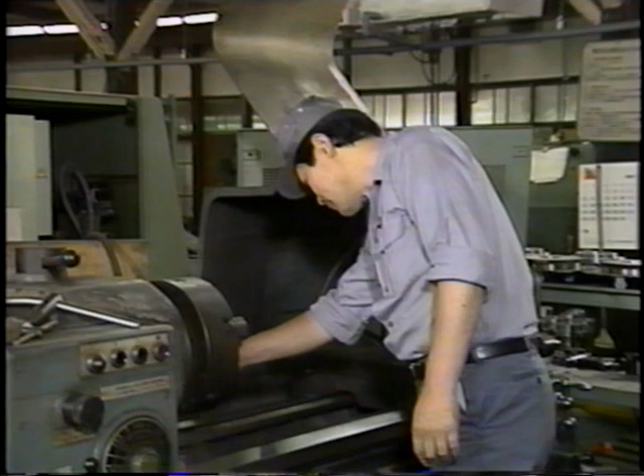But what does this have to do with work in the factory, you may well ask? Well, setup operations can be puzzling, and they're all to do with putting things in order, too. The only difference is that this is only a game, and my time is not money. But if this was a setup operation in the factory, what would happen then?

There's a real problem if you don't know when you're going to be able to start the next production operation because you have to wait for setup. Right? So, what we all want is zero setup losses, no waste of time, no waste of effort, no endless repetition, and that kind of thing. And that's what this video is zeroing in on.

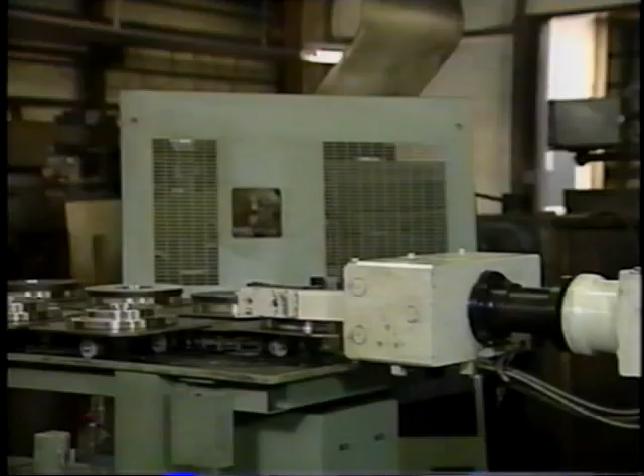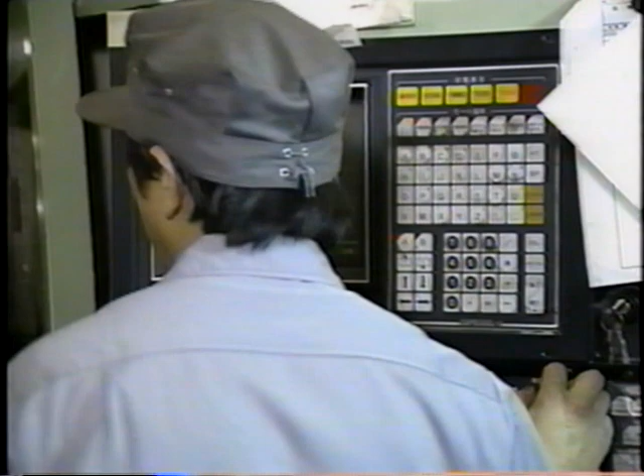The vital work of operators is to produce fine quality products through efficient use of equipment. But if the work process is constantly delayed as a result of setup operations, the production volume goes down and the cost per product goes up.

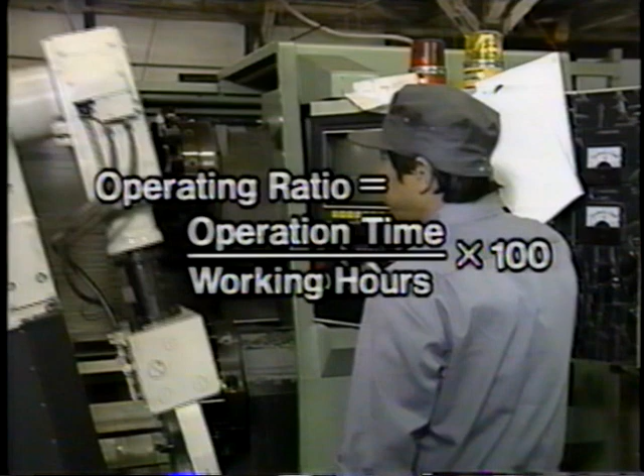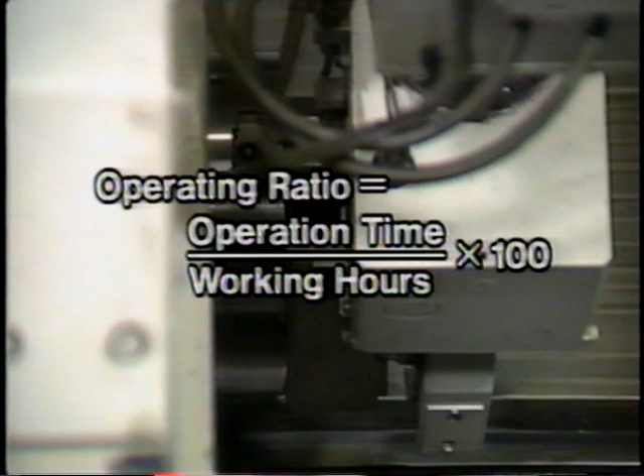The operating ratio of equipment equals operation time divided by total working hours multiplied by 100. The result clearly shows what percentage of our working life is spent productively and how much is basically unproductive. Reduced stoppages leads to longer actual production time and a far better operating ratio.

For example, with equipment that is capable of producing 100 items per hour, if 1 hour is lost for setup operations and these have to be done twice during one 8-hour shift, then the total operating time will only be 6 hours and the number of items produced will be 600. The operating ratio is only 75%.

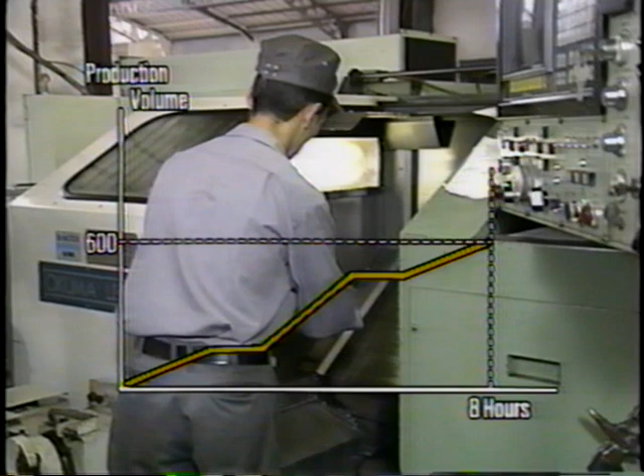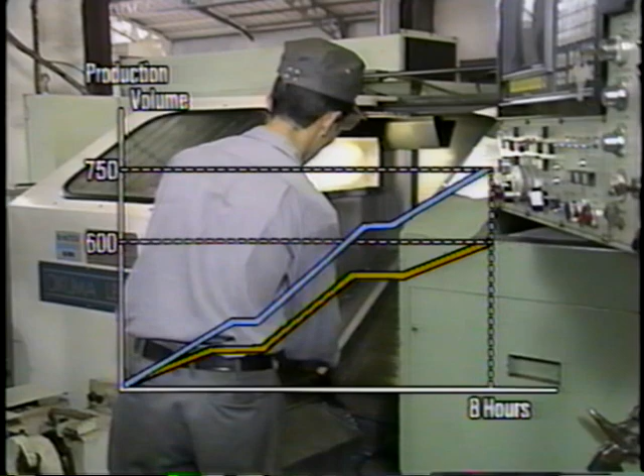By cutting the setup operation time to just 15 minutes each time, we can increase total operating time to 7.5 hours, and 750 items will be produced, giving us an operating ratio of 93.75%. In other words, there will be a 25% increase in productivity.

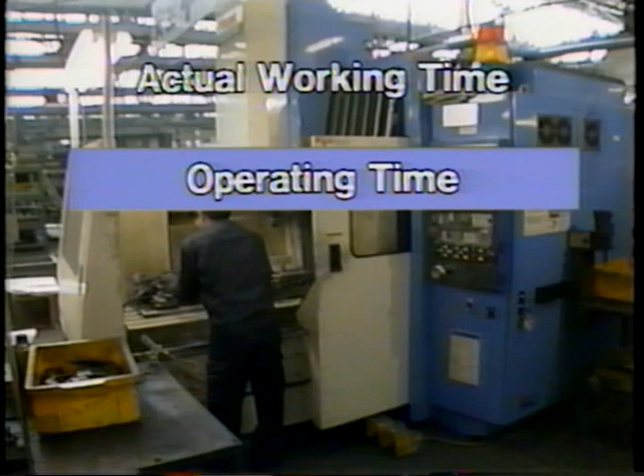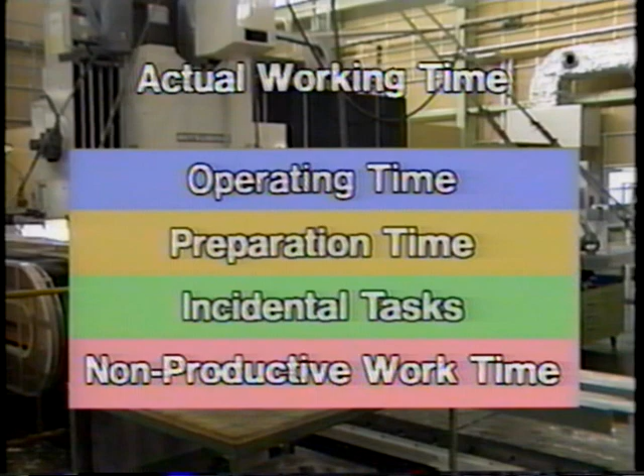Let's see how this works in practice from an operator's point of view. Our actual working time is divided into operating time, preparation time, incidental tasks, and non-productive work time. Preparation time includes necessary preparations both before and after the production process. Incidental tasks includes measurements, checking with manuals and plans, and so on.

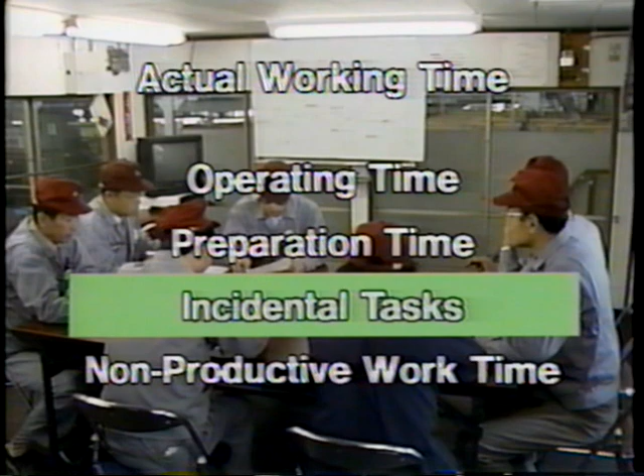Non-productive work time includes any activities outside actual production activities, such as meetings and clerical matters. If the non-productive time spent each day is more or less fixed, then simply by reducing the time for incidental tasks and preparation time, operators can increase their operating time, in effect lowering the cost per item. Get the idea? Losses in setup operations are naturally a problem for the operators.

What I think we should do next is take a look at what we mean by setup losses from 4 different viewpoints. 1. Work procedures. 2. Organization of setup operations. 3. Accuracy of equipment, jigs and tools. And 4. The work environment.

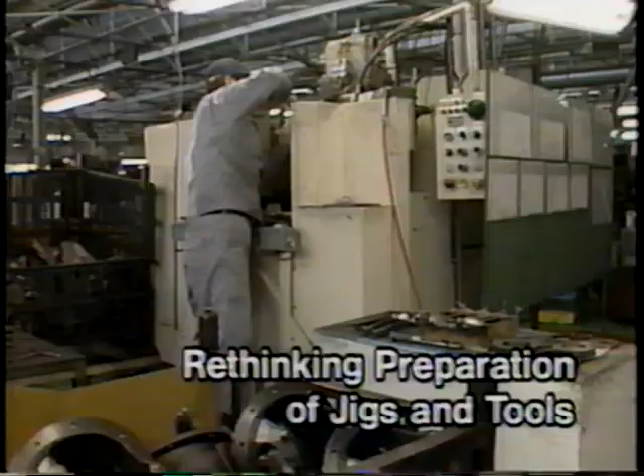Most factories use a variety of jigs and tools during setup operations. Although according to the basic rules of 5S, these should all be kept in a centralized position, three things often occur. Items are not in the right place. It's not clear who is using them. And some items are damaged or broken.

If you have any of these problems, then time is wasted looking for the necessary items and you may not be able to use them when you do find them. The point is that jigs and tools needed for setup operations should always be kept and used in such a way that the operator who needs them never has to move around searching for them. In other words, no moving and no searching.

To ensure this, there are three important questions you can ask yourself. Are your jigs and tools suitable for the job, and is there a sufficient quantity of them? Are they stored in an accessible place and clearly marked? And are they available for immediate use?

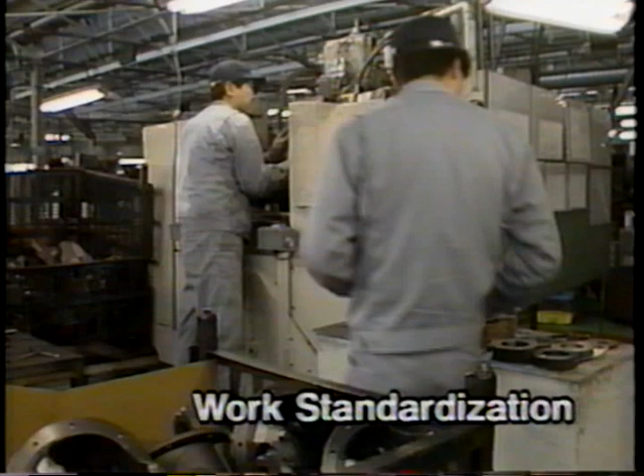On the other hand, even if all the preparation is done well, unless the work procedure for setup operations is correct, there will be little improvement in efficiency. Product quality and production time will vary if each operator sticks to different work procedures.

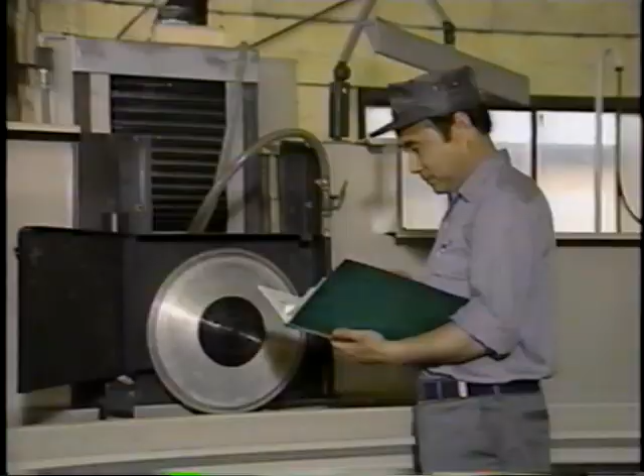Each piece of equipment basically has its own work procedure. It is very useful to draw up a standardization checklist that everyone can understand easily. It should be readily accessible and everyone should be trained to stick to the right operation method rather than use their own individual way.

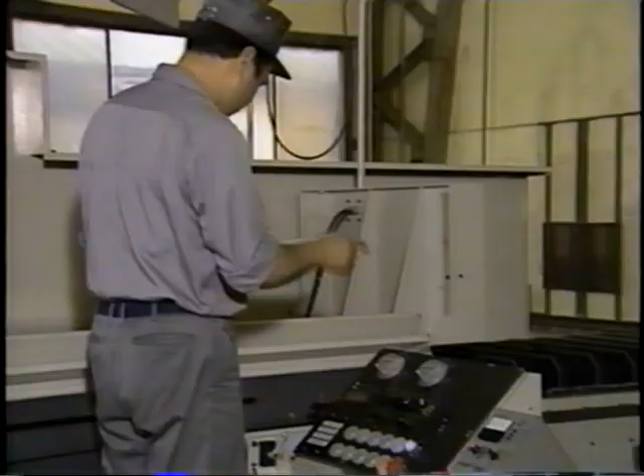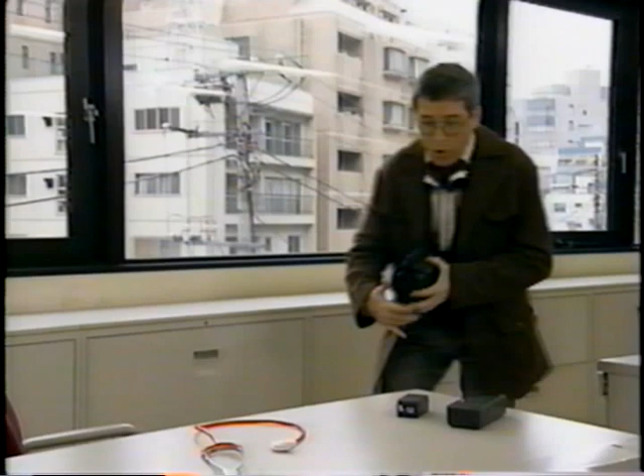5, 4, 3, 2, 1, action! Oh, good, good. Hold it right there. Don't move. Good. Oh. Battery low. Is your battery okay? Did I charge up that other battery? Oh no! Dead! Failed in my setup again. It's reviving!

Which reminds me of what I want to say next. There are two stages of setup. External setup, and you guessed it, internal setup. Internal setup means setup operations which can only be done by stopping the equipment, like stopping to change the battery. And in the factory, that means breaks in production, and that causes losses.

On the other hand, external setup can be done while the equipment is still working. For example, getting the battery charged in advance. In the factory, production can continue while this is going on, and the result? 0 losses for that phase of the setup. But not everything we treat as internal setup necessarily has to be internal. We should have a little think about whether some internal setup operations could in fact be converted into external setup operations.

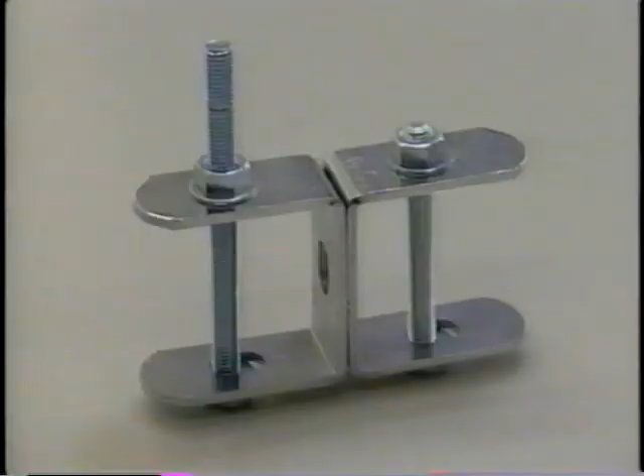You can either save or waste time with setup operations. For example, look at the size of this bolt. Enormous. Take me a long time to get the nut off. Who designed this? A time waster, no doubt. This is only one. Just think if you had 4. But we're always coming across this type of thing in the factory. At last. But this, on the other hand, the right size. No waste of time, no waste of energy.

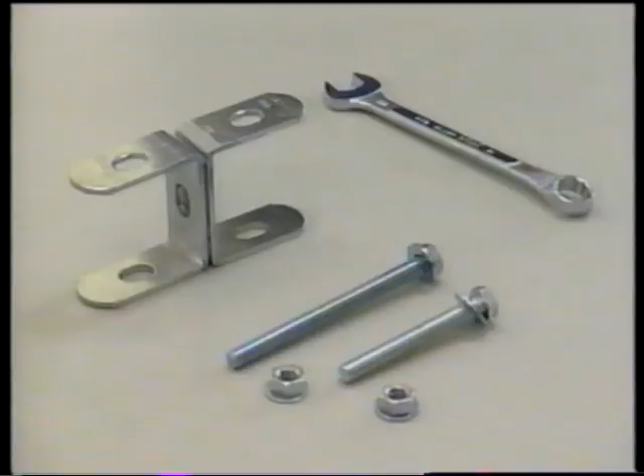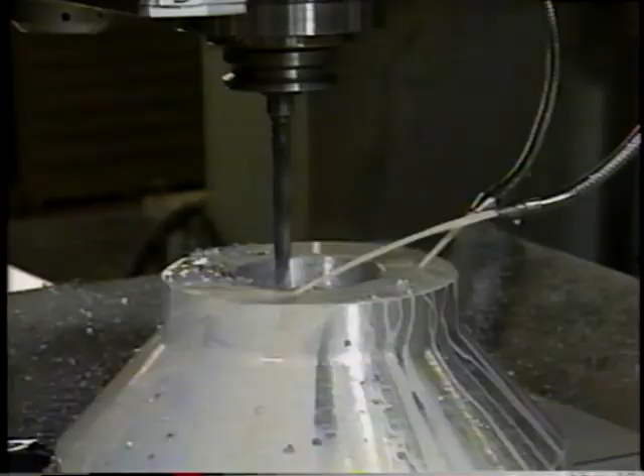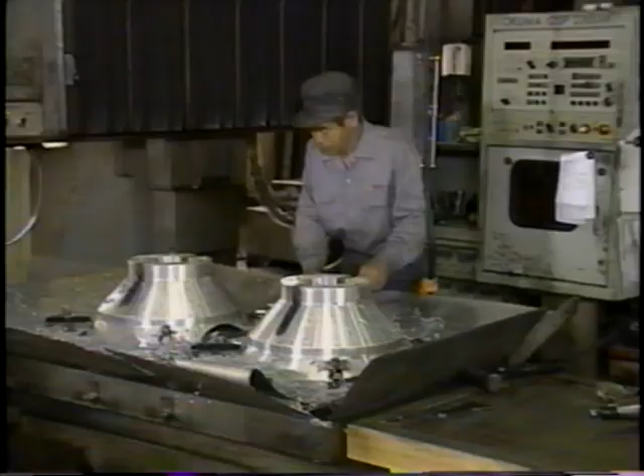Here's an example of improvement of setup operations. In this factory, workpieces used to be fixed on a pallet one at a time for drilling and processing. A lot of time was wasted during workpiece exchange. The improvement implemented here was to fix two workpieces on the pallet at the same time and control processing with numerical control. The time spent removing and replacing pallets was greatly reduced through careful thinking and the use of automated equipment.

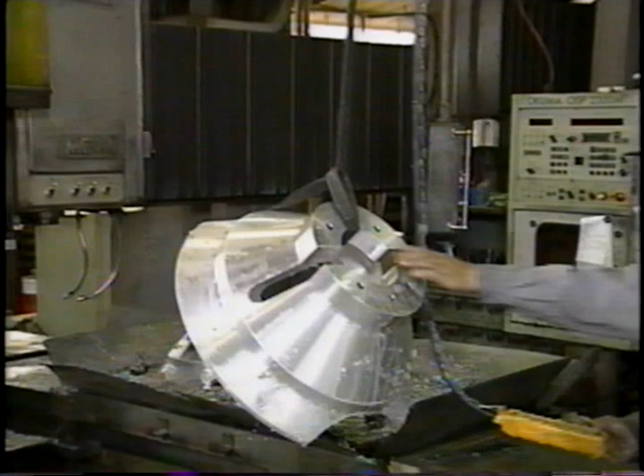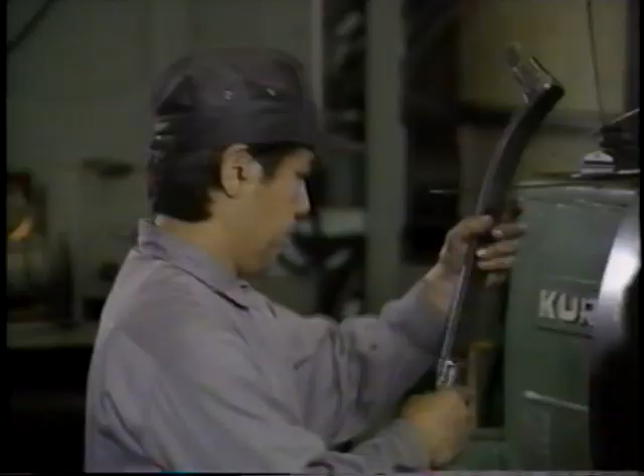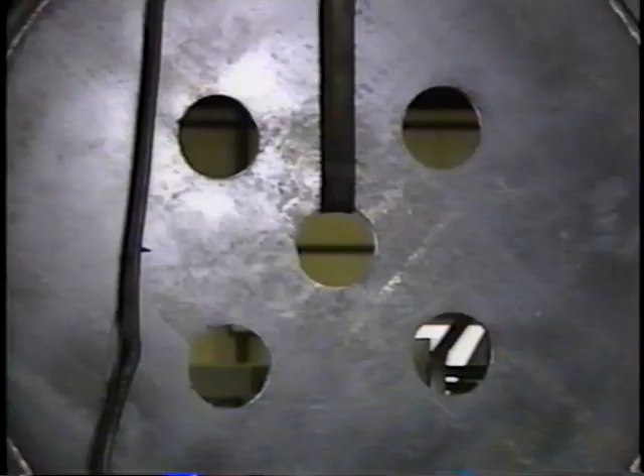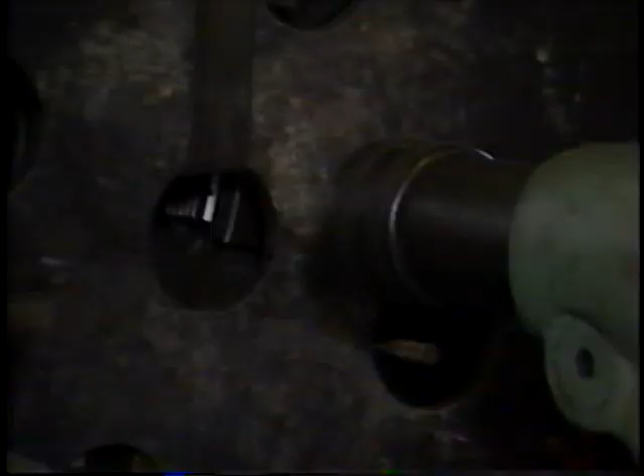You can also reduce setup time by giving careful thought to the shape and condition of the workpieces. This lathe processes the front face and edge of flywheels. Before improvement, a chuck was used like this, so it was impossible to process the front face and the edge simultaneously. The solution was to add holes to the wheels so that chucks could be fixed from the front. Now both the setup operation time and the processing time have been significantly reduced. This rethinking of shape and condition of workpieces can be applied widely to reduce the number of setup operations and the number of procedures involved.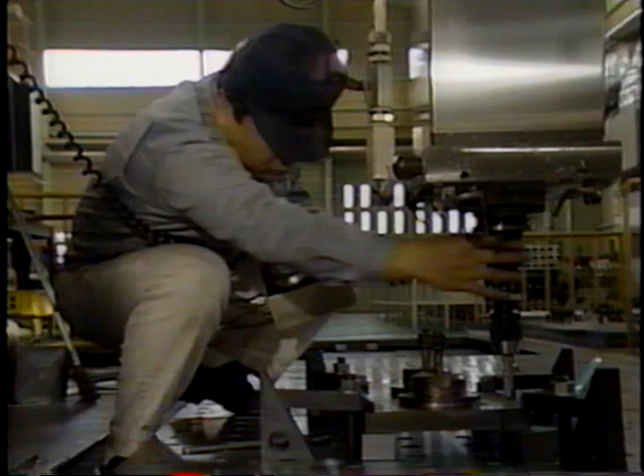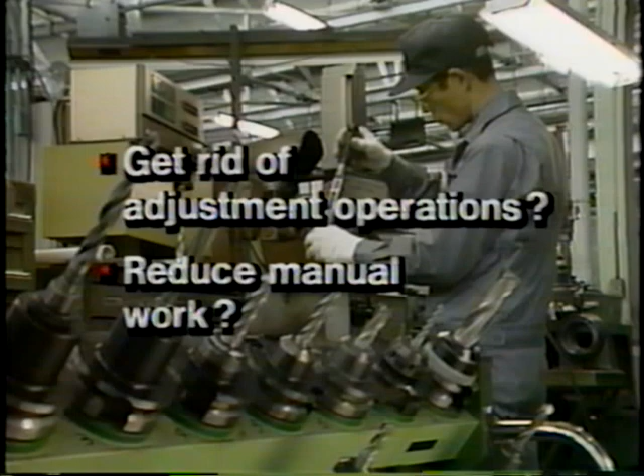It's true to say that a large part of setup operation time consists of adjustment operations. Adjustment involves a repetition of corrections until you can find the optimum and stable conditions for production. This requires trial processing and checking. So it's not just a matter of time. It also depends a great deal on the technical skill of the operator. Any mistakes, and you may have to repeat the process. What we have to ask is whether it's possible to get rid of the adjustment operations and get machines to do the work for us. In other words, convert manual tasks into automated tasks.

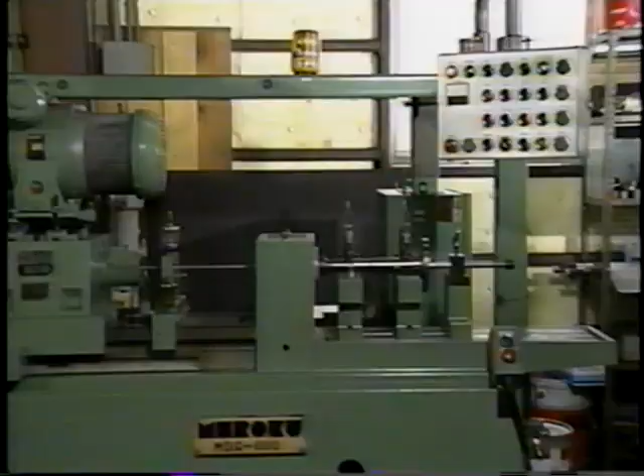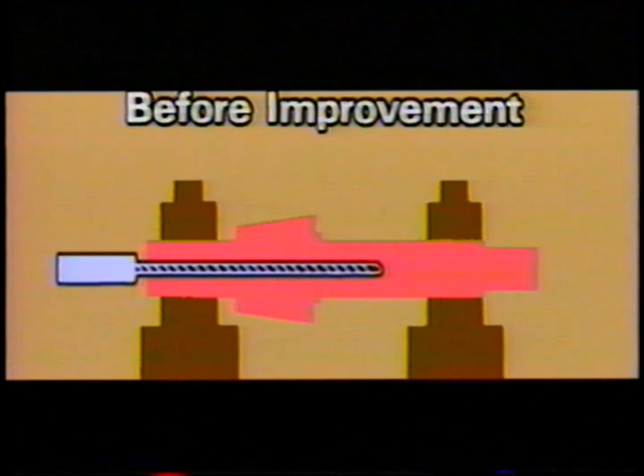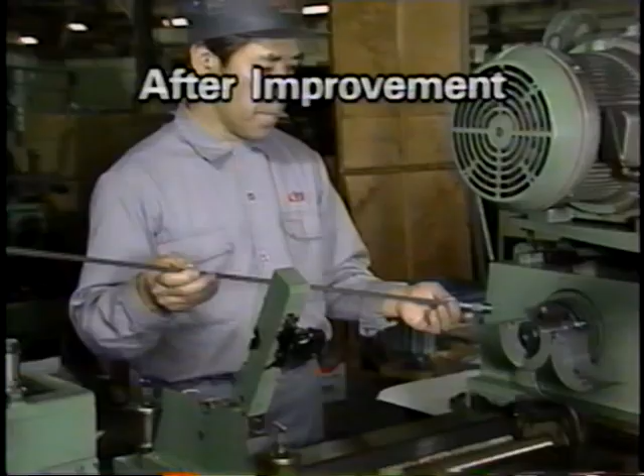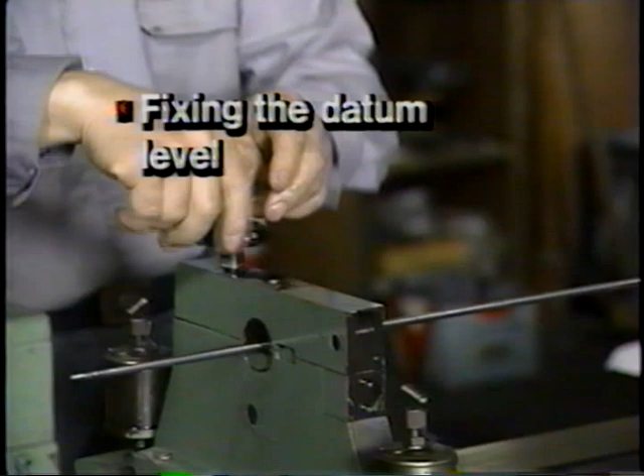Here's an example. This equipment is used to drill holes in spindles. It used to be necessary to drill from both ends to complete the hole, involving adjustment time between the two drilling operations. After some thought, a way was found to drill the hole in one operation using a gun drill. You can also reduce adjustment time by improving these 3 points: fixing the datum level, measurement methods, and accuracy of equipment, jigs and tools.

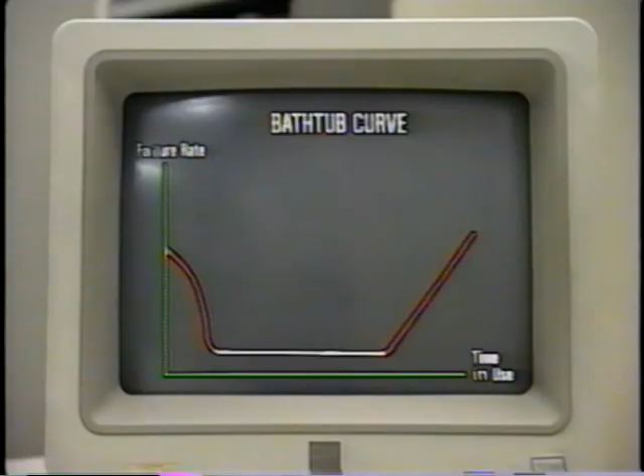I've got a great graph here to show you. It looks just like my bathtub, and in fact, that's what it's called, a bathtub curve. It shows the length of time equipment has been used and the rate of breakdowns. When equipment is first used, problems often occur, but these are usually dealt with by the manufacturer.

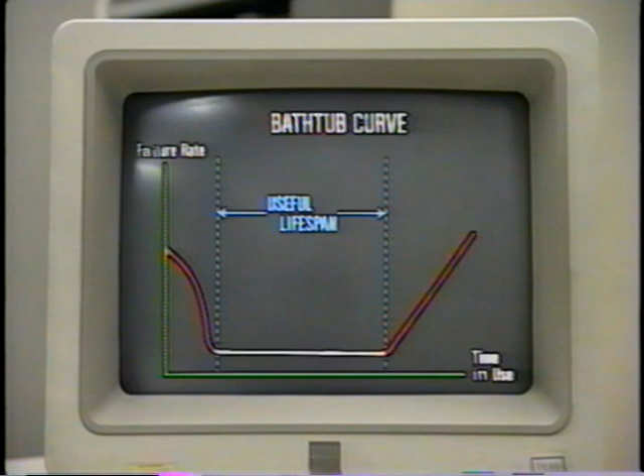Generally speaking, once equipment has passed its useful lifespan, it starts to suffer from fatigue and wear and tear, and there is an increase in the number of failures and breakdowns. Operators normally attempt to prolong the equipment life through careful maintenance and preventive measures. This means maintaining the required accuracy through protecting equipment from deterioration and dealing with any minor defects which could cause problems.

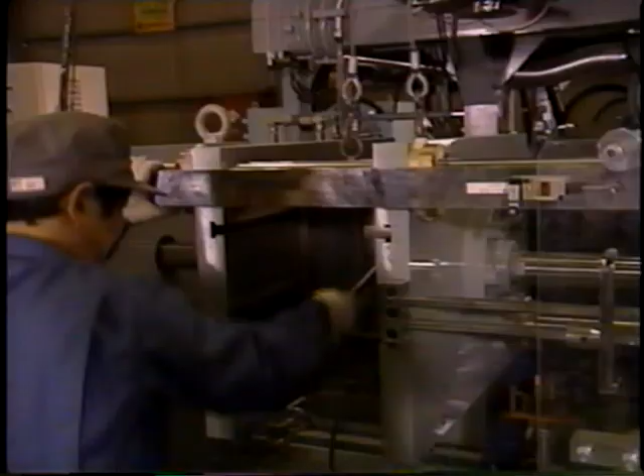In particular, with regard to setup operations, the accuracy of jigs and tools will have a considerable effect on working hours. It's essential to maintain accuracy at all times. Jigs and tools must be cleaned after each use and all the important parts checked to make sure they are operating with complete accuracy.

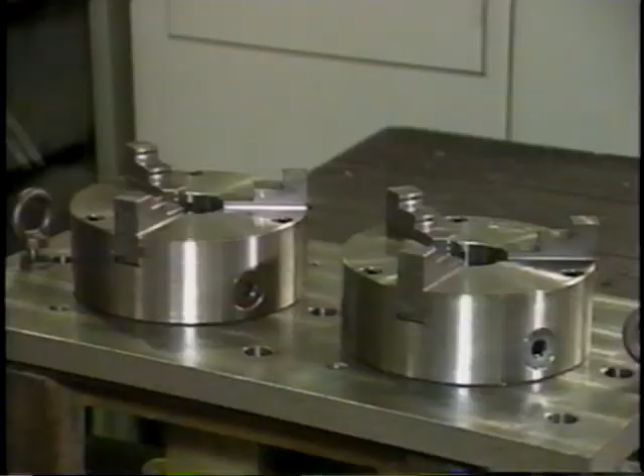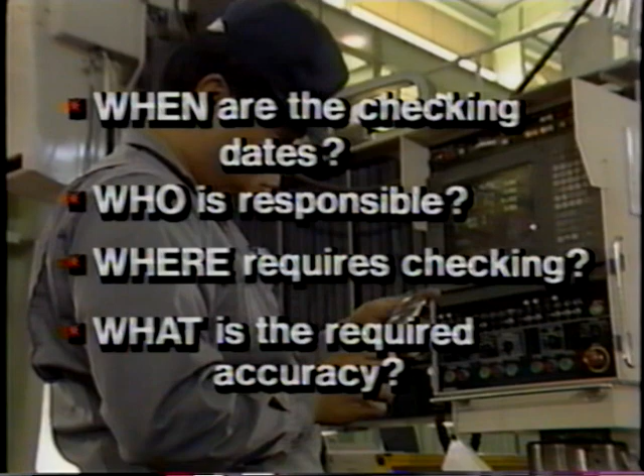Periodic checking is also very important. The checking cycle has to be determined according to the type of jigs and tools in use. To consolidate a periodic checking timetable, you need to answer these 4 questions. When are the checking dates? Who is responsible for checking? Where requires checking? What is the required level of accuracy?

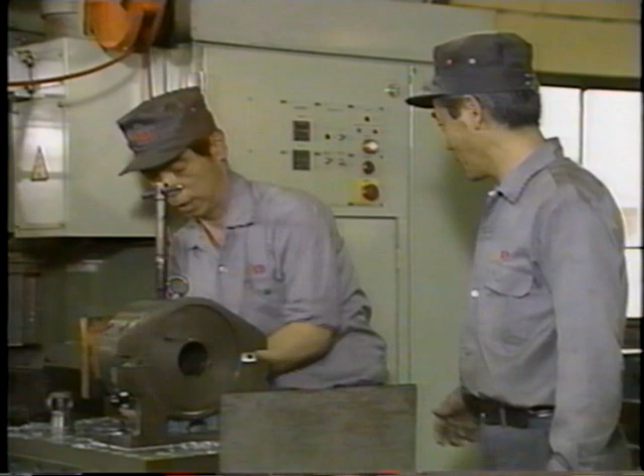However, even if the accuracy of jigs and tools is properly maintained in this way, you still may not be able to get the required accuracy because of the assembly methods employed during setup operations. For example, let's think about a case where assembly of 5 10mm jigs produces a 50mm total height. If the tolerance for the total height is 1/100th of a millimetre, is it really possible to obtain that accuracy when the tolerance of each 10mm jig is also 1/100th of a millimetre?

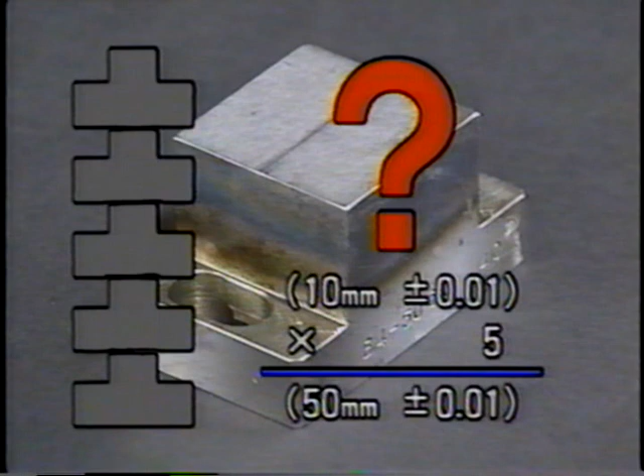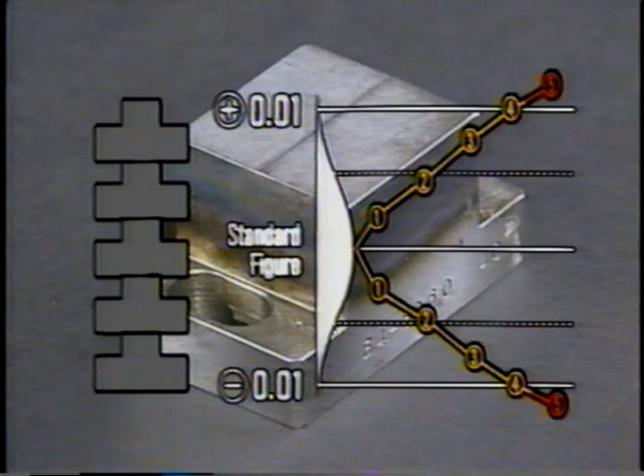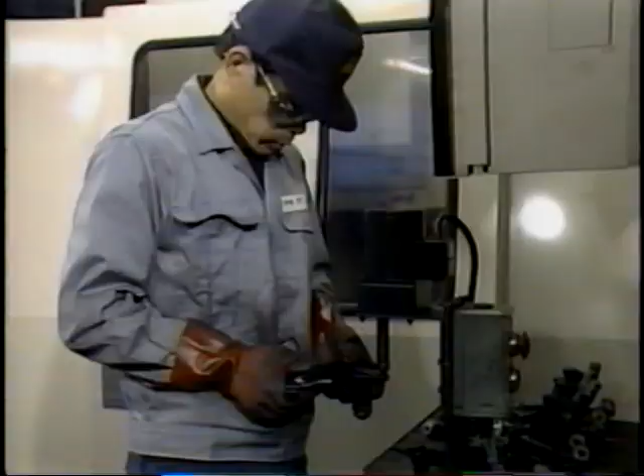As far as possible, it is better to prepare a properly adjusted stack of jigs or a stack with fewer components, rather than having to put many individual jigs together each time. This is the kind of improvement which not only reduces adjustment time, but also removes the point of aberration right from the start. As you can see, through proper maintenance of accuracy at all times, you can greatly improve efficiency and reduce the need for time-consuming adjustments.

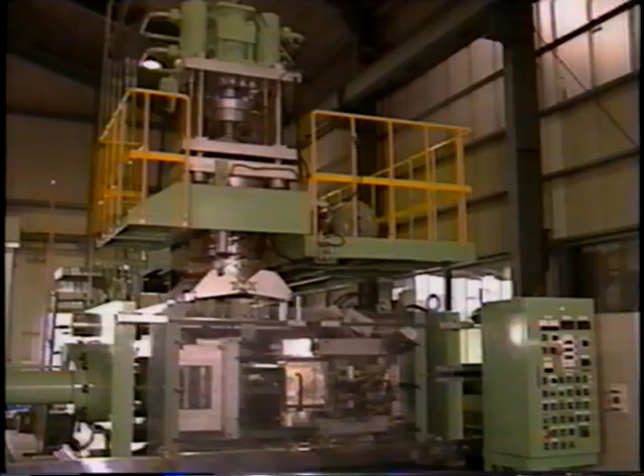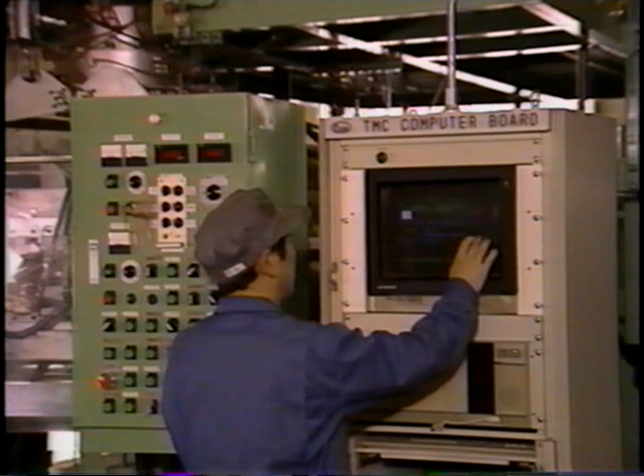But what about the work environment? Even if you rationalize your setup operations, you can't expect much improvement if you don't think about the environment around the equipment. You have to ask yourself a few simple questions. Are your workbench and workplace designed for easy use or not? Are you sure that around your equipment you have no potential sources of trouble which could encourage equipment deterioration?

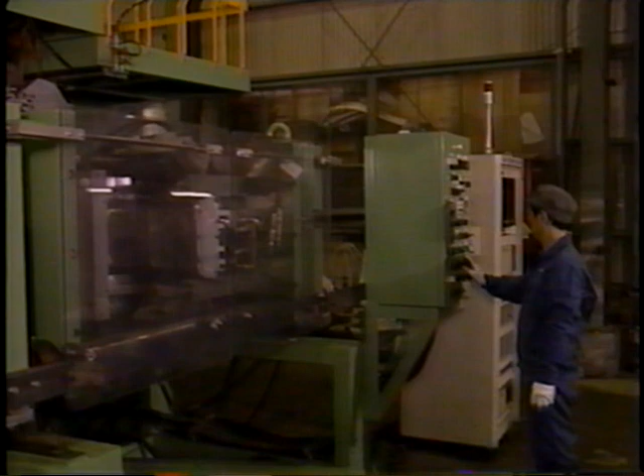Is there anything in your workplace that is unstable, loose or wobbly? Is your lighting adequate or not? It's these kind of little things in your work environment which might well cause problems during setup operations. In other words, you have to improve your work environment at the same time as you improve your operations. Let's look at an example. These are shelves used for storing jigs. Each shelf can be pulled out independently.

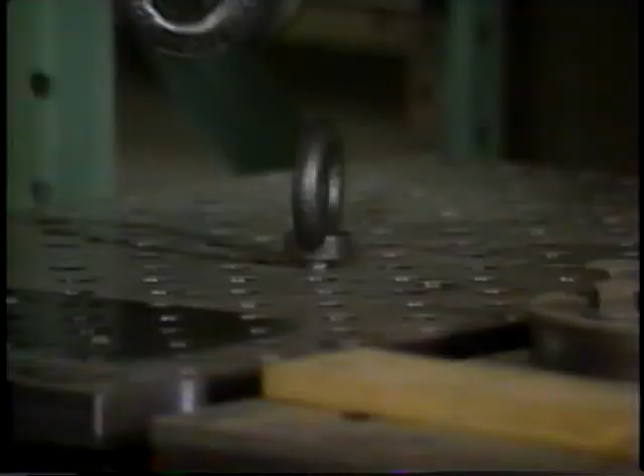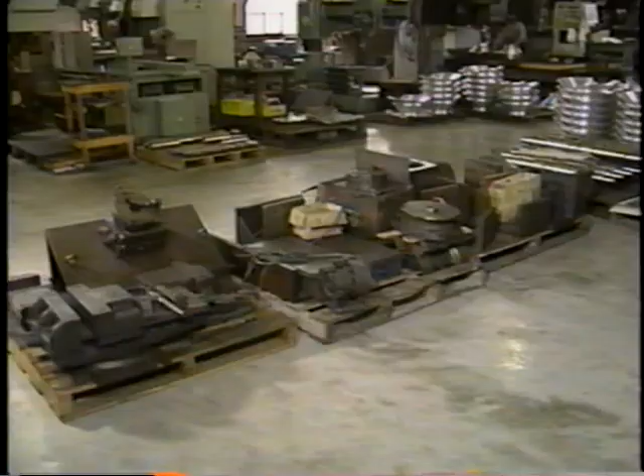In this factory, jigs used to be stored on pallets on the floor. However, that storage method brought on various problems, particularly concerned with safety. The pallets used up valuable floor space. It was impossible to fix a storage position, and it took time to find the jig required. The first improvement was to put the pallets onto shelves. However, the whole pallet had to be removed by a forklift truck and lowered to the floor before a crane could be used to remove the jig.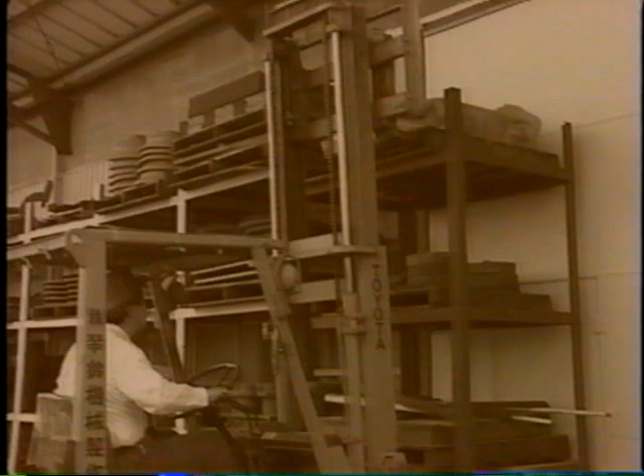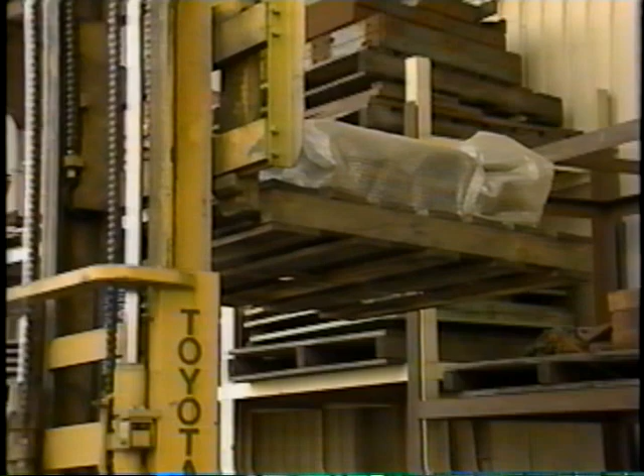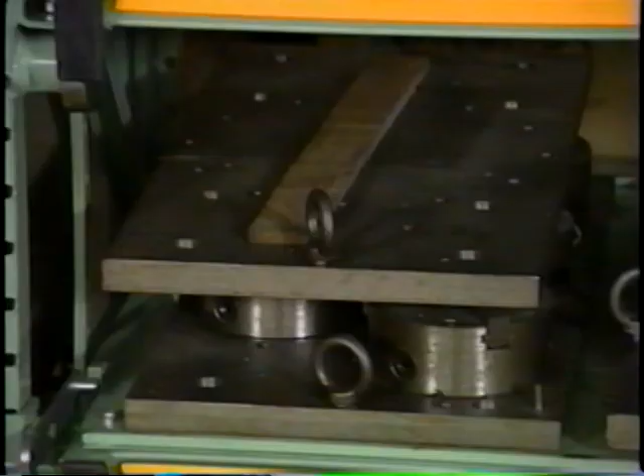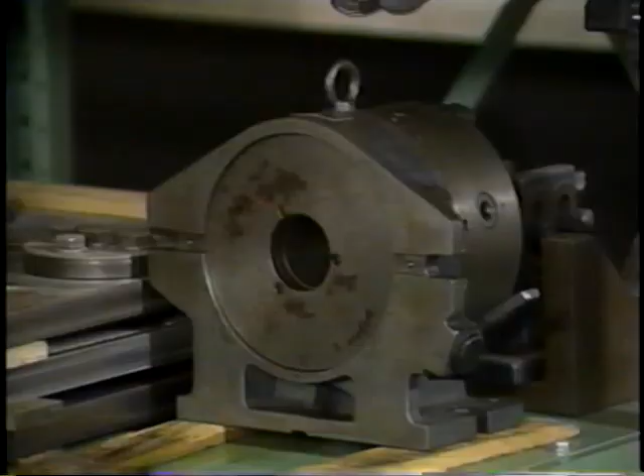The situation still wasn't perfect. So a second improvement was implemented. The pallets were replaced by sliding shelves, which can easily be pulled out to give easy access to the crane. The result is increased accessibility, efficiency, and safety. The point is to work on improvements until you create a working environment which works well for you.

What we've seen so far is there's lots of room for improvement in things we've always taken for granted. Every day I ask myself, what is the purpose of this particular work? Is this work really necessary? Isn't there some way of doing it faster and more easily? You probably ask yourself the same things, and if you don't, perhaps you should. You see, improvements in setup losses can only start when operators get down to taking a good, hard look at all the setup operations they work on. And remember our ultimate aim: 0 setup losses.